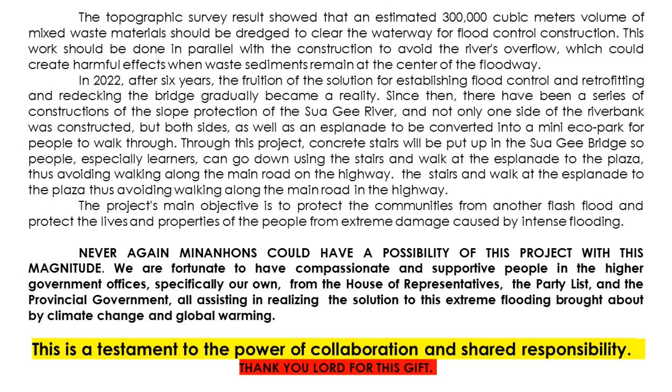Never again should Minanhons face the possibility of this kind of disaster. We are fortunate to have compassionate and supportive people in the higher government offices, specifically our own from the House of Representatives, the party list, and the provincial government, all assisting in realizing the solution to this extreme flooding brought about by climate change and global warming. This is a testament to the power of collaboration and shared responsibility. Thank you, Lord, for this gift.

Aerial view proposals for flood control slope protection projects in Mina, Iloilo, including retrofitting and redecking of the Suague Bridge slope protection project, to mitigate the impact of massive overflow of the Suague River caused by calamities brought about by climate change.

Since 1995, more than 8 hectares of public land have already been discovered, recovered, and titled under the name of the municipality of Mina. This includes Montogawe Eco Park, originally known as Montogay, lots along the Suague River.

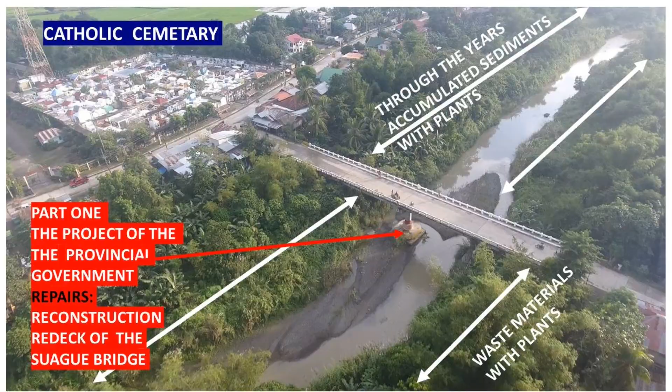Part 1: The project of the provincial government - repairs, reconstruction, and redecking of the Suague Bridge. Through the years, the river became deeply silted. In most portions, the water level is side by side with the bank of the river.

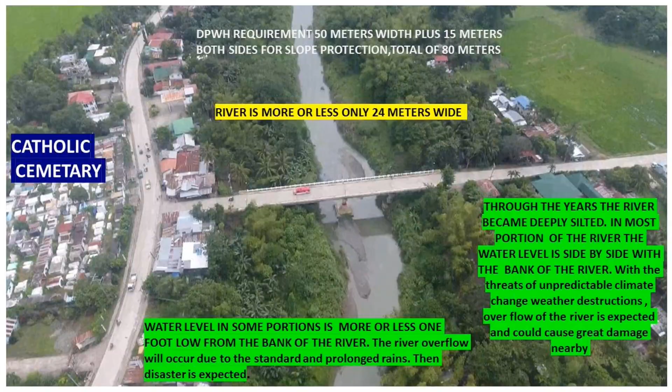With the threats of unpredictable climate change and weather destruction, overflow of the river is expected and could cause great damage nearby. Water level in some portions is more or less 1 foot below the bank of the river. River overflow will occur due to sudden and prolonged rains, and then disaster is expected. Start of the DPWH slope protection project.

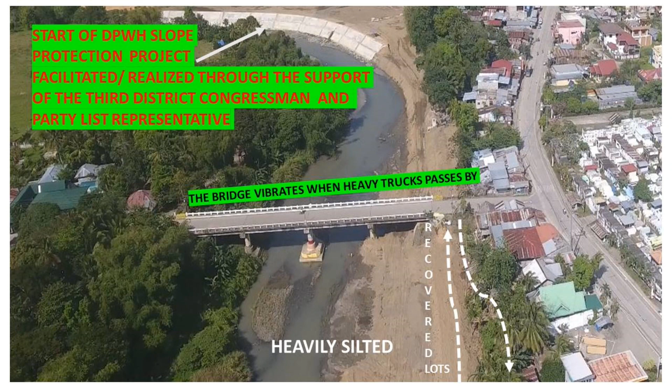Facilitated and realized through the support of the 3rd District Congressman and party list representative. The bridge vibrates when heavy trucks pass by.

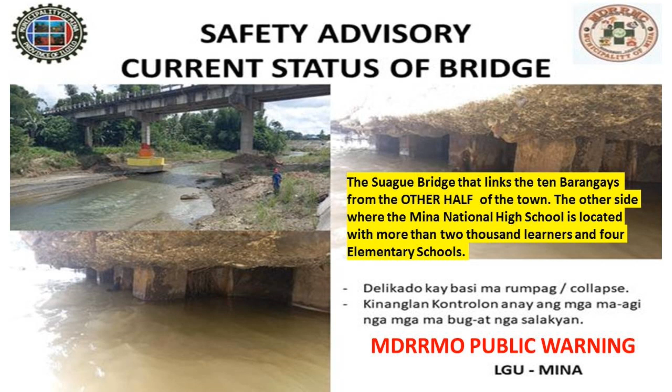This bridge will be retrofitted and redecked by the provincial government as an ongoing project. The Suague Bridge links 10 barangays to the other half of the town, where the Mina National High School is located, with more than 2,000 learners, and 4 elementary schools.

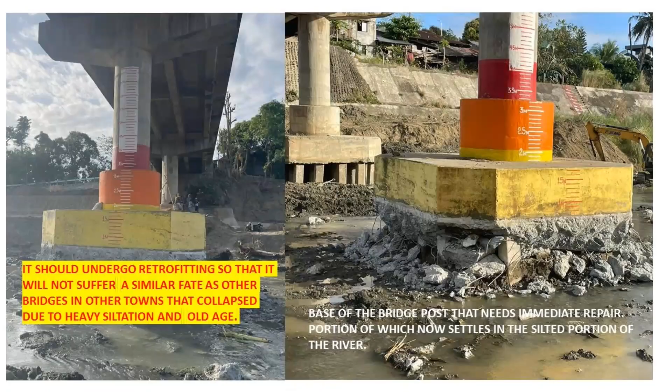Personnel from LGU, PENRO, PEO and DPWH Joint Inspection Team constantly monitoring the project. It should undergo retrofitting so that it will not suffer a similar fate as other bridges in other towns that collapsed due to heavy siltation and old age.

Silt mixed waste material was first taken out to expose the damaged portion on the base of the bridge. Waste materials at the center and side walls of the river should be dredged out so that they will not be returned to the center of the river when floods or prolonged rain sets in. This can obstruct flow in the waterway at the center of the river.

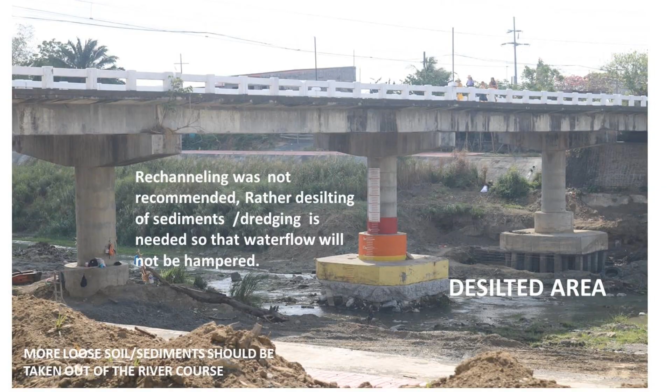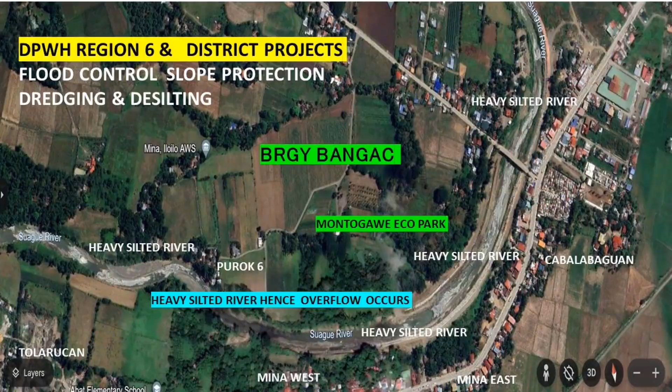Start of the DPWH slope protection project, facilitated and realized through the support of the 3rd District Congressman and party list representative.

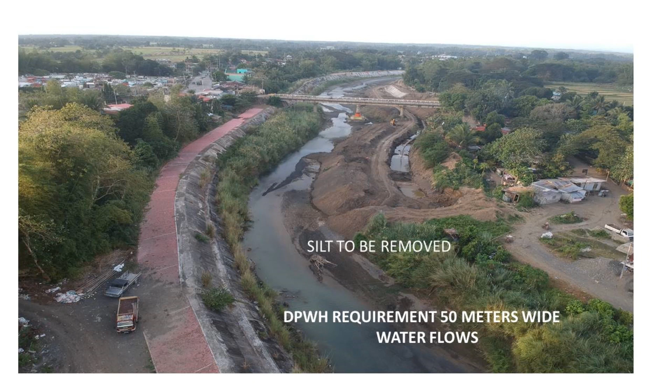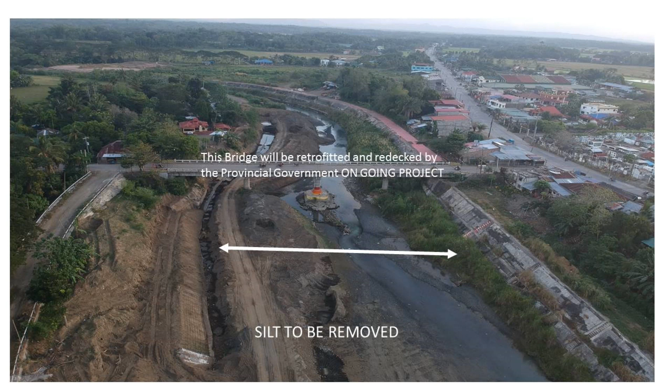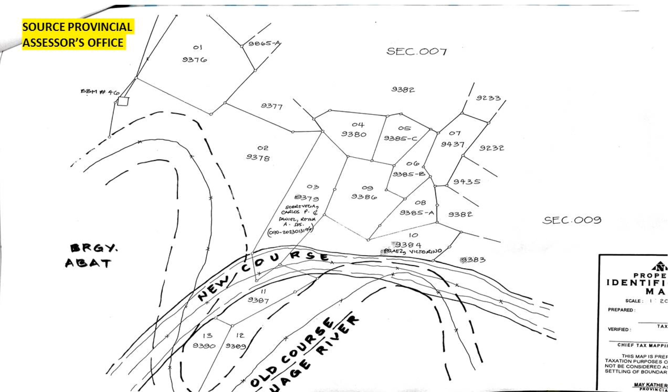Source: Provincial Assessor's Office.

DPWH: the proposed slope protection of Suague River line of waterway.

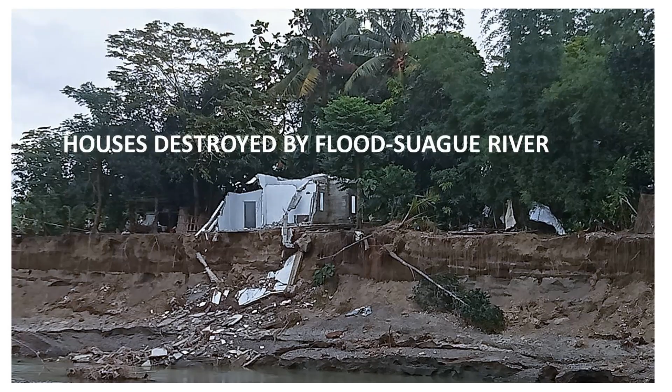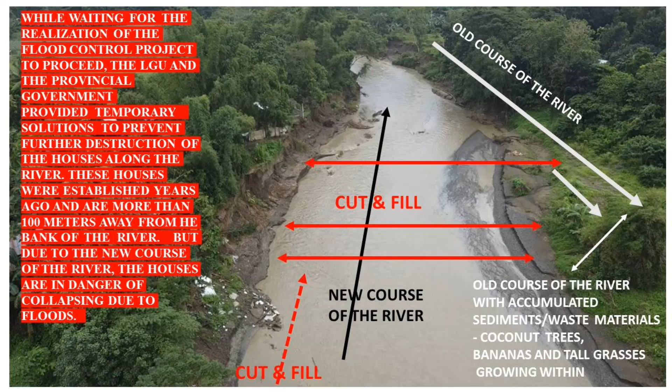While waiting for the realization of the flood control project to proceed, the LGU and the provincial government provided temporary solutions to prevent further destruction of the houses along the river. These houses were established years ago and are more than 100 meters away from the bank of the river, but due to the new course of the river, the houses are in danger of collapsing due to floods. The LGU spent 375,000 pesos for fuel and other expenses and borrowed from a contractor appropriate equipment to push sand to serve as a barrier to protect the houses and redirect the water flow towards the center of the river.

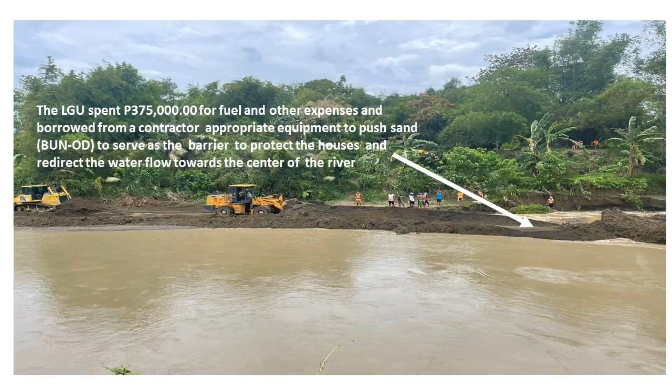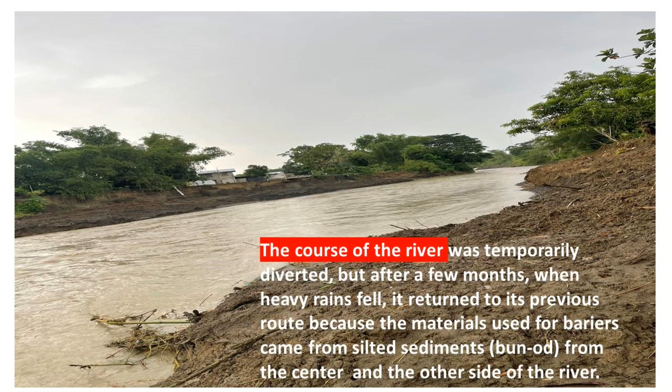The course of the river was temporarily diverted, but after a few months when heavy rains fell, it returned to its previous route because the materials used for the barriers came from silted sediments bun-od from the center and the other side of the river.

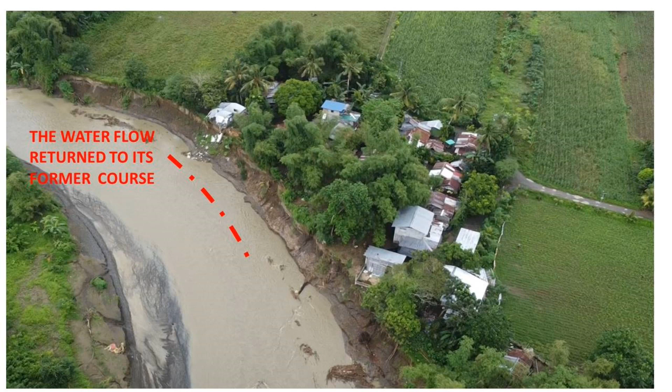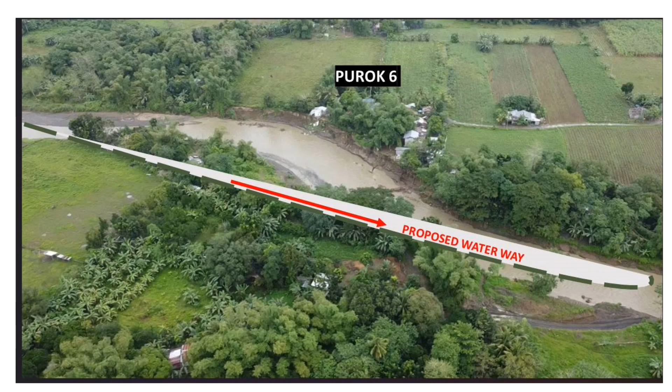Before slope protection is installed in the silted portion bun-od, this project should include removing and replacing the accumulated mixed waste materials with embankment materials required that conform to the standard compaction rating. It is necessary to install appropriate materials behind the slope protection to avoid slippage of these concrete structures later on.

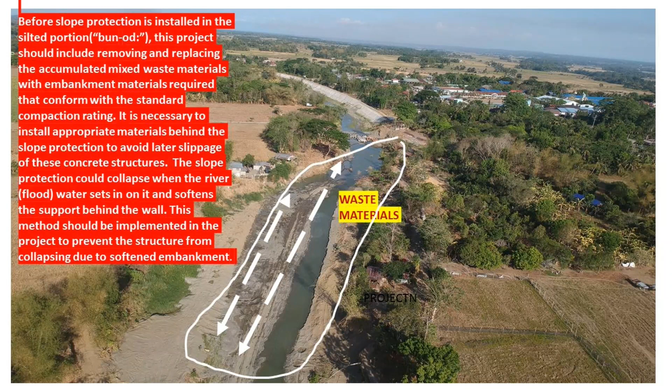When water from the river flood sets in and softens the support behind the wall, this could result in the collapse of the slope protection. This method should be implemented in the project to prevent the structure from collapsing due to softened embankment.

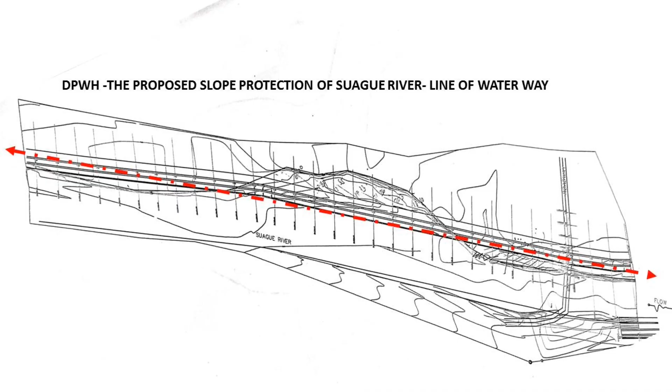DPWH: the proposed slope protection of Suague River line of waterway. LGU Mina updated assessor's record.

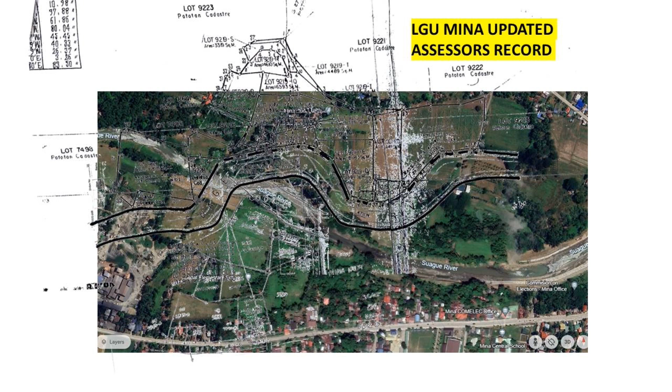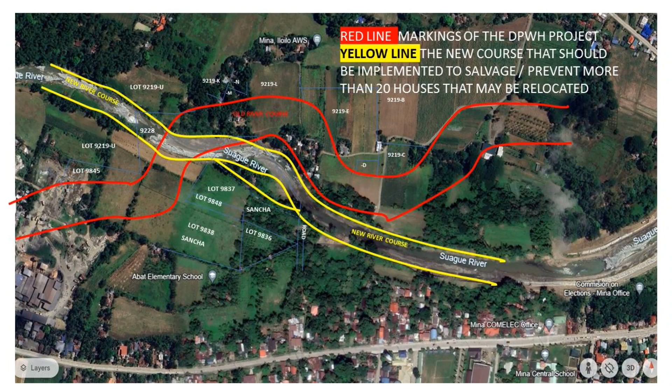Red line markings show the DPWH project. Yellow line shows the new course that should be implemented to salvage and prevent more than 20 houses that may be relocated.

Series of meetings and dialogues to maximize and fast-track the implementation of the project, taking advantage of the summer dry season.

This flood control project is a national government project undertaken through DPWH Region 6 and district level. Mina, Iloilo and its people are the beneficiaries of the project. Hence, coordination and utmost collaboration are needed. This once-in-a-lifetime project could truly benefit the people of Mina as a whole.

The flood control project is one way that could mitigate the destruction brought about by global warming.

Continuous dialogue and consultations regarding this river control project with DPWH region and district engineers, representatives from provincial engineer personnel, and from PENRO. Public consultation and information dissemination given by DPWH personnel to those directly affected by the project.

Attended by the residents and barangay officials from Bangak, Mina East and West, and some members of the Sangguniang Bayan. Actual monitoring is being done regularly.

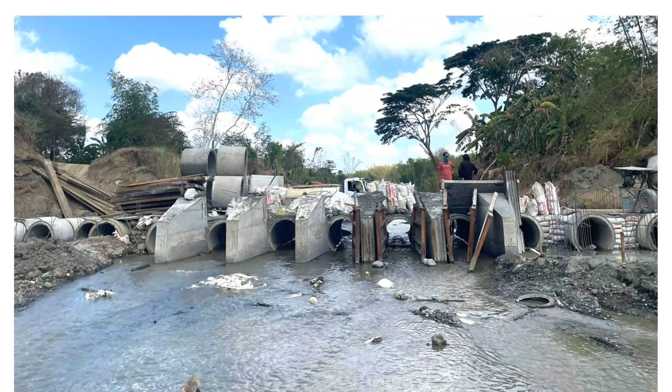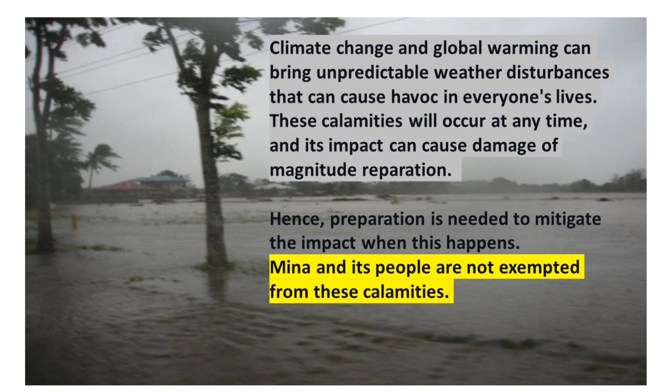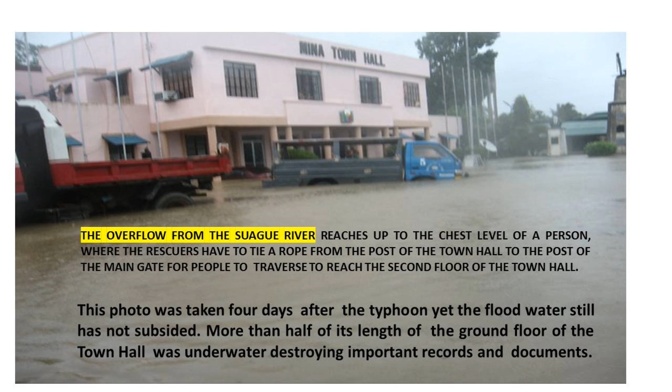More than half of the length of the ground floor of the town hall was underwater, destroying important records and documents.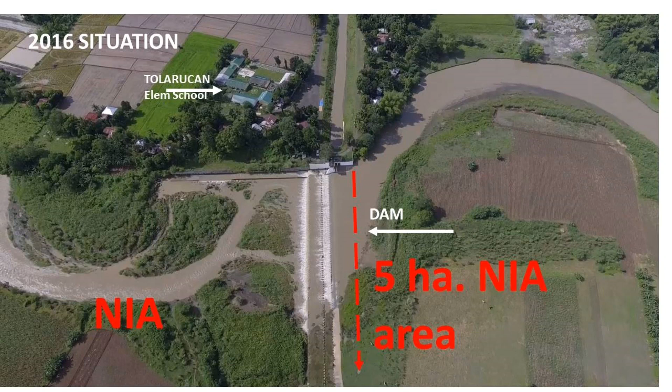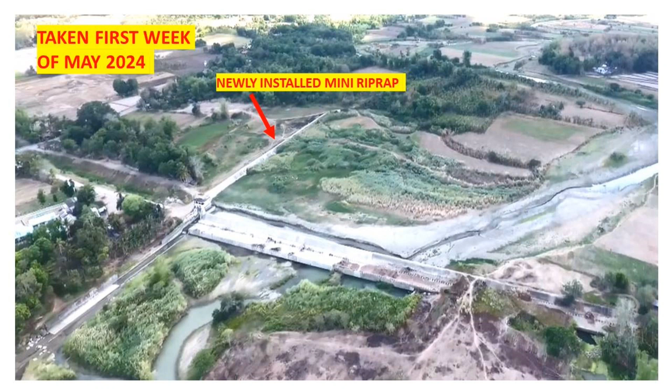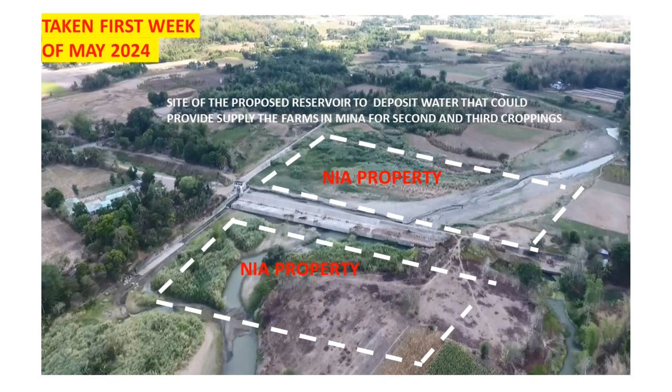The town of Mina is the beneficiary. The implementation of this national government river flood control project is managed by DPWH and the provincial government, and processed through legal procedures and requirements.